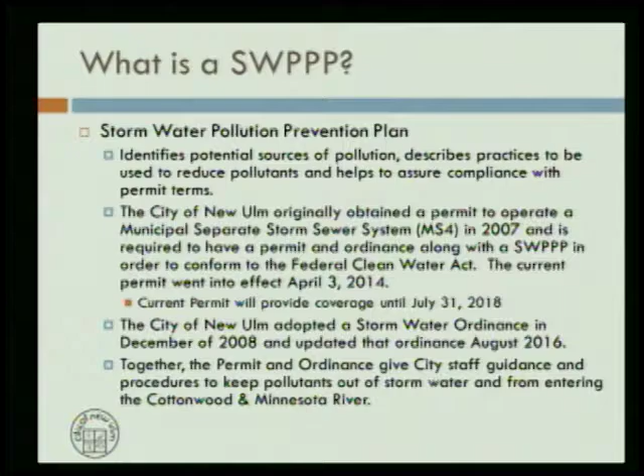So how do we prevent stormwater pollution? The general term for those are BMPs, or best management practices, and there's two types of best management practices. The first are structural BMPs. Those are things such as stormwater ponds, rain gardens, rain barrels. Anything that's an actual physical object is a structural BMP. Non-structural BMPs are properly disposing of yard waste, not blowing grass clippings into the street. They're actual practices that can be used by residents of New Ulm to help keep our stormwater clean.

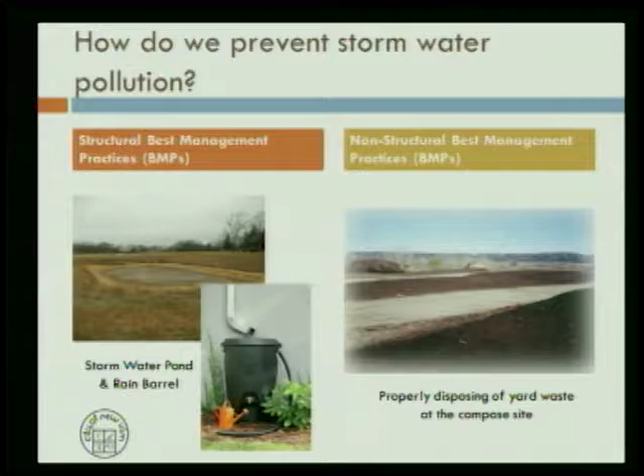So the city stormwater permit outlines 6 minimum control measures to help us progress in preventing stormwater pollution. Those 6 MCMs are public education and outreach, which we're doing a portion of today, public participation and involvement, which we are also doing today, illicit discharge elimination, construction runoff control, post-construction management, and the last one is pollution control and housekeeping. And I'll walk through those MCMs a little bit more in detail.

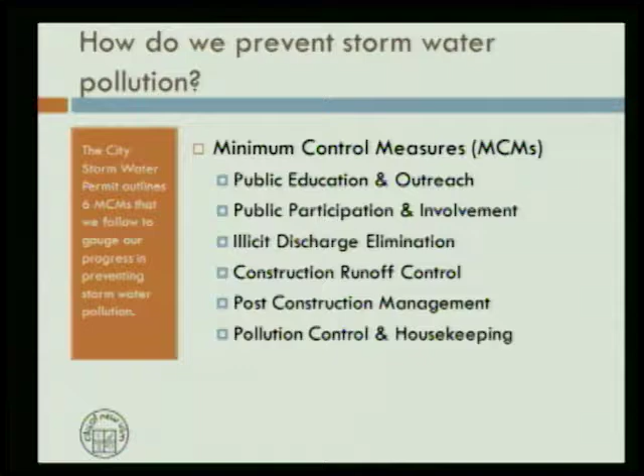So public education and outreach, MCM number 1. So we distribute educational materials and perform outreach activities to inform citizens in New Ulm about the impacts of polluted stormwater runoff and how that affects our water quality. So every year we send out a utility bill flyer. In the past it's been responsible lawns for healthy rivers, and we've done flyers on illicit discharge detection and elimination. We perform staff training with all city and PUC staff that are outside staff. And we really focused this year's training on illicit discharge detection and elimination. I'll go into that a little more in depth in a couple slides here.

We send out contractor and business updates, just permit reminders, any updated techniques or technology to help with stormwater protection. We work with a South Central Stormwater Coordinator group, so other municipalities in our area. We get together, bounce ideas off of one another, and share resources that each of us use. Some communities involved in that are Hutchinson, Mankato, North Mankato, Waseca, Owatonna, Worthington, and Marshall. And then we also perform the annual meeting, which we are doing today.

So public participation and involvement, how do we do that? That's pretty self-explanatory as we reach out to the public to get input and to educate them as well. So we solicit input on our Stormwater Pollution Prevention Plan at the annual meeting today, and then we also have this SWPPP, or the Stormwater Pollution Prevention Plan, available at all times on the city website for residents to examine and look at and educate themselves.

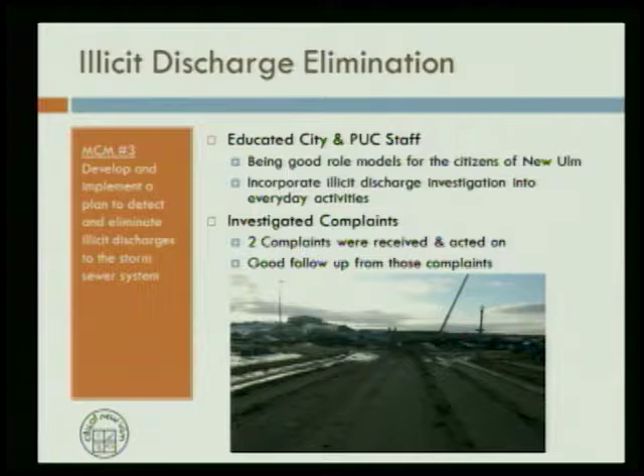So construction site runoff control, it kind of ties into that last picture. MCM number 4 is utilizing the stormwater ordinance and our city permits to enforce sediment and erosion control measures on construction sites. So we have city staff that are certified by the MPCA to perform construction site inspections, and then those staff members then in turn train our city and PUC staff on a yearly basis.

So we track these with stormwater permits. In 2016, we had 24 permits, which resulted in 357 site inspections. We try to get to the sites at least once a week, and then that increases with rainfall events. So if we have large rainfall events, we try to check the sites more frequently.

So of those 24 permits, 5 of those were large site. Large site permits are anything greater. Back in 2016, those were anything that were greater than 10,000 square feet. And then we had 19 small site permits. So a small site would be like a home or a garage or something of that size. And that is 12 less permits than we had in 2015.

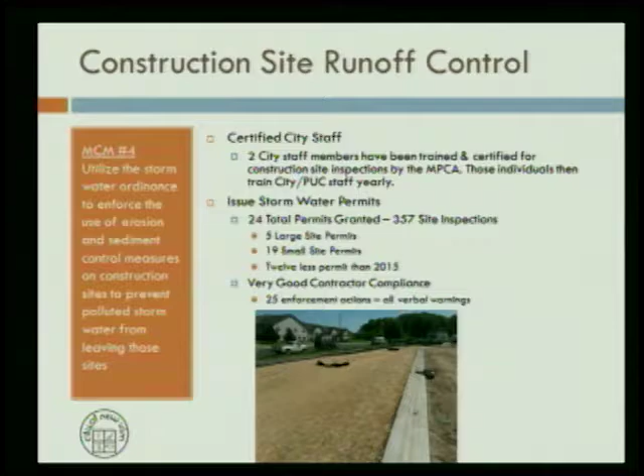Out of those 357 site inspections, we only had 25 enforcement actions. And those were all verbal warnings, whether it be repairing a silt fence or a wood chip berm that was damaged or needed to be touched up, or maybe street sweeping. So when we can stick to verbal warnings and the contractors have good compliance from those warnings, I feel like everybody's doing their job pretty well at that point.

So post-construction management is MCM number 5. So we utilize the stormwater ordinance to address stormwater runoff from new development and redevelopment projects. So kind of simplifying that is any discharge from a site prior to construction should have that same discharge post-construction. So that brings into effect structural BMPs such as ponds, infiltration basins, rain gardens, things like that.

So post-construction flyers are given to contractors and developers along with the permits. Generally something of this nature, there'll be a permit from the city as well as the MPCA. And then we take that information once the BMPs are constructed and we update our BMP database, or our storm sewer system model and mapping system. So when projects are finished, we as-built those. We get the constructed information and then insert them into our mapping database.

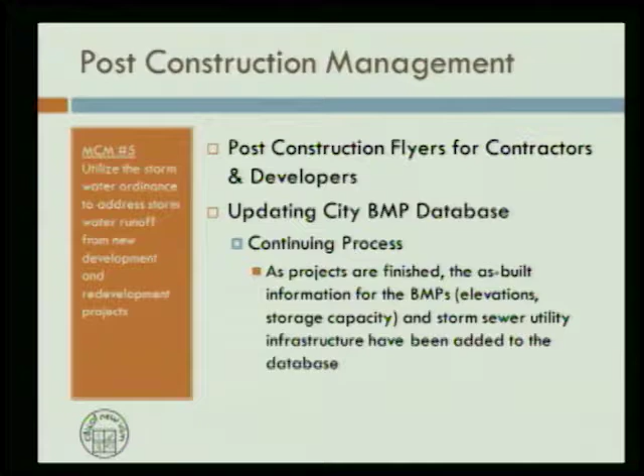Pollution prevention, MCM number 6, and housekeeping as well, is preventing or reducing pollutant runoff from the city of New Ulm. So once a year, we inspect 100% of our city outfalls and stormwater ponds. We inspect them for maintenance reasons and to see how efficiently they're working.

When we inspect those, we check for displaced riprap, or if there's volunteer vegetation that's growing around them that's causing issues with the pipe or the outfall. Check the pond bottoms to see if the ponds are filling up with sediment, if they need to be cleaned out, and then share that information with maintenance staff and work to rehab those as needed.

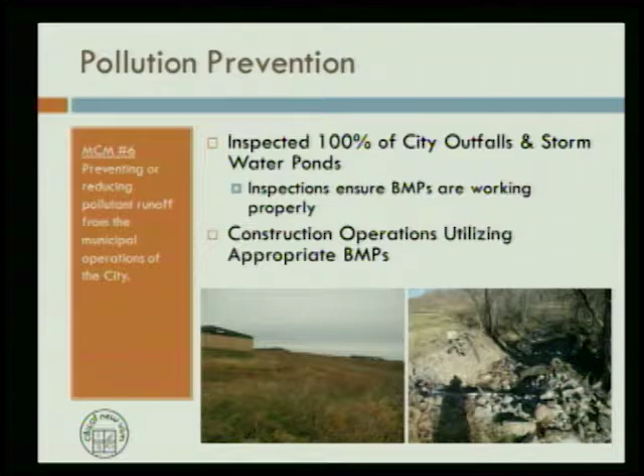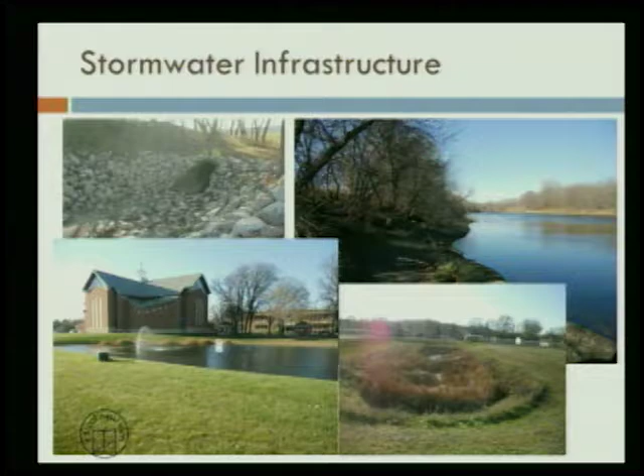So what did we change in 2016? So as mentioned before, in 2016 we adopted or revised our stormwater ordinance. And the revisions in that ordinance just helped the city comply more aligned with the MPCA guidelines and requirements. So it was pretty much language updates and changing items to match the MPCA.

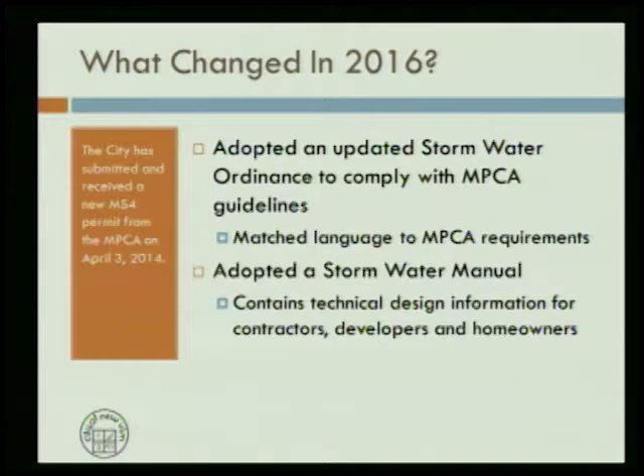And along with the ordinance, we also updated or created a stormwater manual. And the manual contains all of the technical design information for contractors, developers, and homeowners. So moving forward, hopefully we won't have to do ordinance updates as frequently, and we'll be able to change requirements in the stormwater manual as the MPCA guidelines change. That's a little easier for us to adopt changes to the manual than it is to the ordinance.

So what to expect in 2017 and beyond. We continue to work with our stormwater coordinators group. They actually put on a couple of those local coordinators and perform stormwater training, which we have staff attend. They do a very good job. We work with the school district for any opportunities for stormwater education within their curriculum. We continue to update and improve our BMP techniques. We continue education on the proper use of those BMPs. We continue to survey our pond BMPs for efficiency.

In our construction package this summer, one of the projects is the dredging of the 5th North and Garden Street stormwater pond. And that pond is filled up with quite a bit of sediment. We'll be dredging that out this summer, or might extend into the winter depending on the conditions of the pond. We continue to educate the citizens of New Ulm, really focusing on illicit discharge detection, reporting, and elimination.

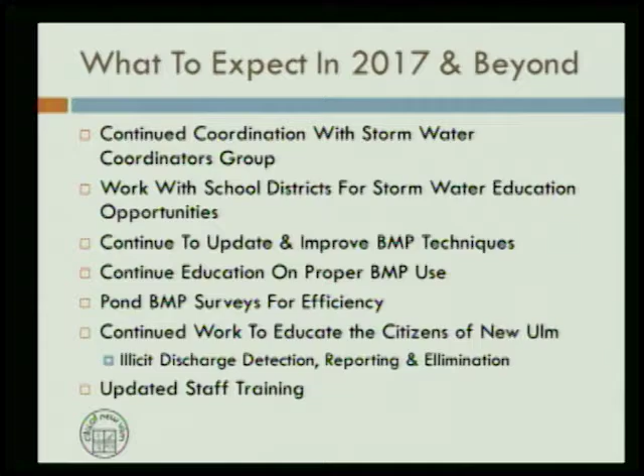So what I mean by reporting is there is a form on the city's engineering page. It's an illicit discharge complaint form or reporting form. You can fill it out and then either email or mail it to our office, and we can take that form and then investigate what that complaint is. And then we continue to update staff on new training techniques when they become available.

So with that, we'll take this time to read any written questions, which I don't believe we received any this year. No, we do not have any written comments or questions, Joel. Okay, and then if there's any questions from those in the audience, we'll take those at this time. Looks like there aren't any in the audience, so we thank you for your time.

And if you have any questions in the future pertaining to our stormwater pollution prevention plan, we encourage you to contact the city engineer's office. Thank you.